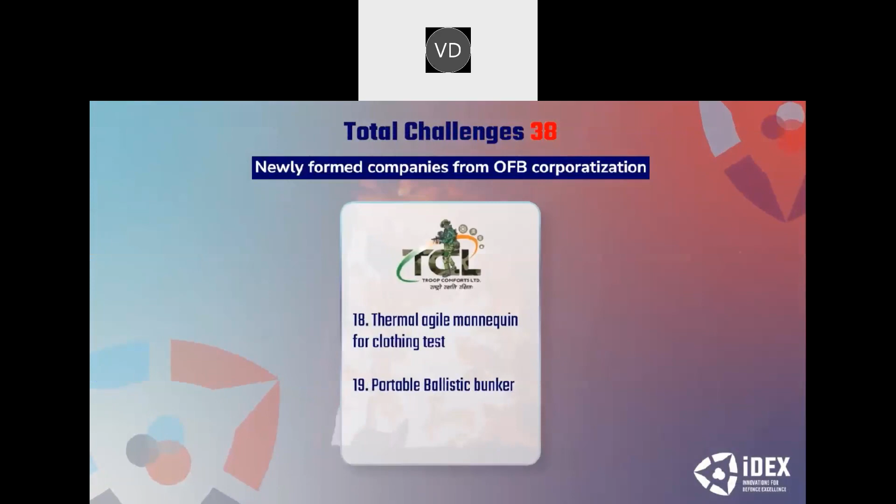Newly formed companies from OFB corporatization include Munitions India Limited with two challenges, Gliders India Limited with two challenges, India Optel Limited with four challenges, Troop Comforts Limited with two challenges, Armored Vehicles Nigam Limited with three challenges, and Yantra India Limited with two challenges.

YIL is participating for the first time and has stated two problems. I hope IDEX will bring innovative solutions to these problems. There is one challenge from the Indian Army, one from the Indian Navy, two from the Indian Air Force, and for the first time, three challenges from the Indian Coast Guard.

We have introduced three niche ideas under the IDEX scheme. This reflects the vision of Making in India and Atmanirbhar Bharat. Also, for the first time in IDEX, the Ministry of Home Affairs has participated with 7 challenges.

These challenges span across a wide range of advanced technologies, including artificial intelligence, advanced imaging and sensor systems, big data analytics, autonomous unmanned systems, secured communications, etc.

We invite startups, MSMEs, individual innovators, and research and academic professionals to apply for DISC 6. Selected applicants will get grants of up to 1.5 crore rupees, along with the opportunity to co-create and co-develop the defense technologies of the future with our armed forces. Besides the grant, selected winners receive product and business acceleration support from IDEX partner incubators, and access to defense facilities for QA and certification.

This is the next observation, wherein the polarization is not uniform. The one in blue is the horizontal plane and the one in red is the vertical plane. Ideally, if the polarization is circular, the patterns are expected to overlap in all regions, but we can see there is a gap between these two patterns.

When we refer to uniform polarization, we mean that the patterns should be overlapped at least from minus 90 degrees to plus 90 degrees, with a best match. If required, there can be a deviation of probably 1 dB or 2 dB.

We expect the development to take care of these issues and to ensure the other parameters, like beam width, 3 dB beam width, axial ratio, squint, and also the back lobe in all the polarizations - vertical, horizontal, slant, and in totality circular. This development should probably be for left-hand circular polarization.

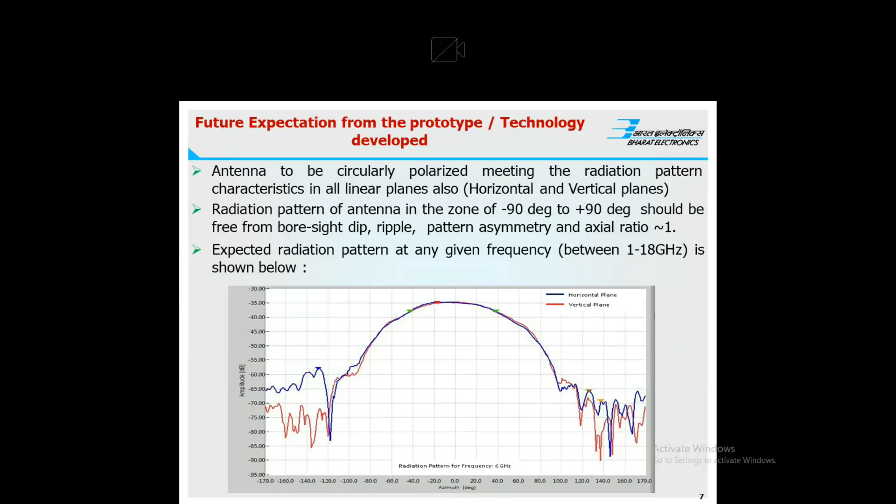So ultimately, the axial ratio shall be better than 2 dB over azimuth of plus 90 to minus 90 degrees over the frequency band. And it should, by default, meet all the parameters like beam width, back lobe, squint for all polarizations, meaning linear and circular, left-hand circular. This will result in achieving a better direction of arrival with accuracy of 10 degree RMS in all sectors.

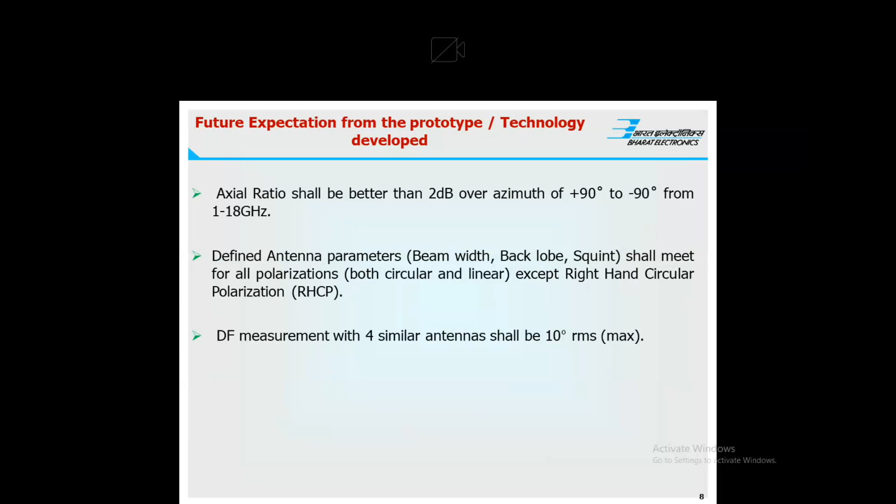Hope I could detail the problem statement, which can help. Do you have any particular doubts on this? Yeah, this is Rehan. So may I know which antenna solution you are currently using? It is a cavity-backed spiral antenna. No, the data sheet or any part number. Part number, we have sources from others, but I am not exactly getting what you are looking for in the data sheet. If possible, I can share it with you.

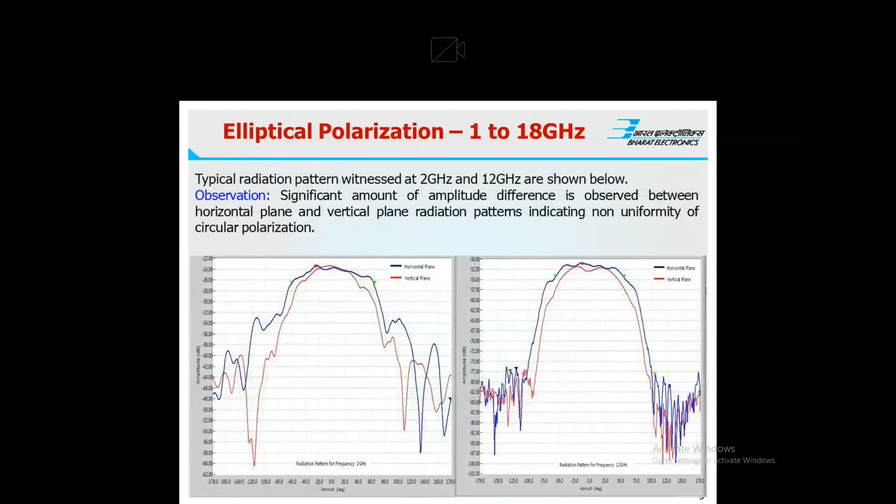Okay, and as you said, the polarization is left-handed, right? Yeah, left-hand polarization. Okay, and the size constraint is fixed or? We are already using a few antennas, so we have a restriction in the size. We have to match the dimensions to the existing ones, so that it can be replaceable. Actually the problem is that I think you are using from 2 gigahertz onward, right? And it goes to 1 gigahertz onwards. So if we go to 1 gigahertz, then the size of the antenna should be double, right?

Okay. So that's why I am asking if we can increase the size of the antenna a little bit. As I mentioned, we are already using these systems, and the new systems have to match the form factor. Otherwise, it requires additional modification on the platform of the aircraft.

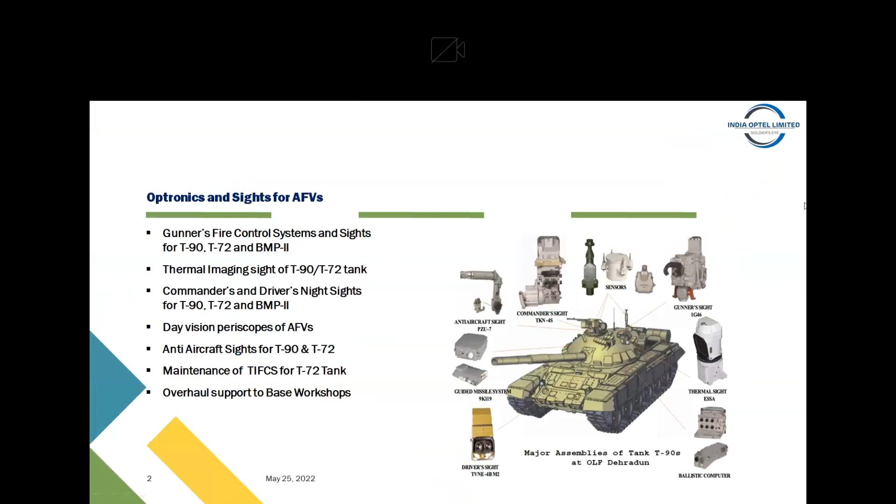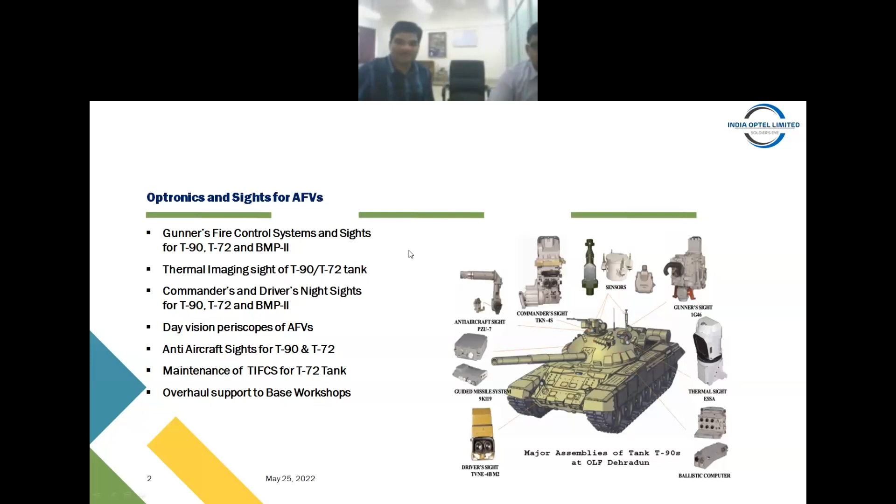Before we discuss the challenges, first I would like to discuss what we do at IOL, so that the startups can correlate the products to which these challenges belong. At IOL we have 3 units. One unit is for manufacturing fire control systems and optoelectronic sights of armored fighting vehicles. The second unit manufactures sights for artillery and infantry. And the third unit manufactures cables for field telephones and other equipment. It is called Ordnance Factory, Ordnance Cable Factory, Chandigarh.

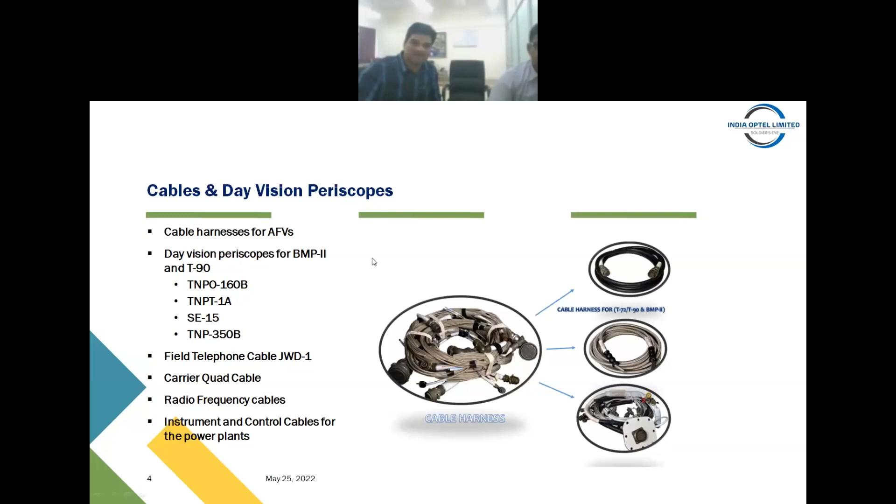Its core products are cables only. So these 3 units belong to IOL, and presently we have given these 4 challenges in this SIS. Of these 4 challenges, 3 challenges belong to the T90 tank gyro stabilizer of the gunner's main sight 1G46, and 1 challenge belongs to the gyro motor, which belongs to the T72 tank gunner's main sight.

The first item, which we name the gyro chassis, is the first challenge. This gyro chassis is meant for giving line of sight stabilization in the gunner's main sight of tank T90. The gunner's main sight is stabilized in 2 axes, horizontal and vertical. This is the core technology which we are manufacturing based on TOT from Russia, and at present this item is imported from Russia. This gyro chassis is part of the gyro stabilizer assembly.

The gyro stabilizer has an interface with the optical channel up to the head mirror, and the head mirror is an assembly projecting out of the tank. So whatever light is collected by the head mirror, that scene has to be stabilized by this gyro stabilizer with the help of the gyro chassis. This gyro chassis stabilizes the line of sight in 2 axes, horizontal and vertical. Both axes have one common gyro motor, which is a mechanical rate gyro concept.

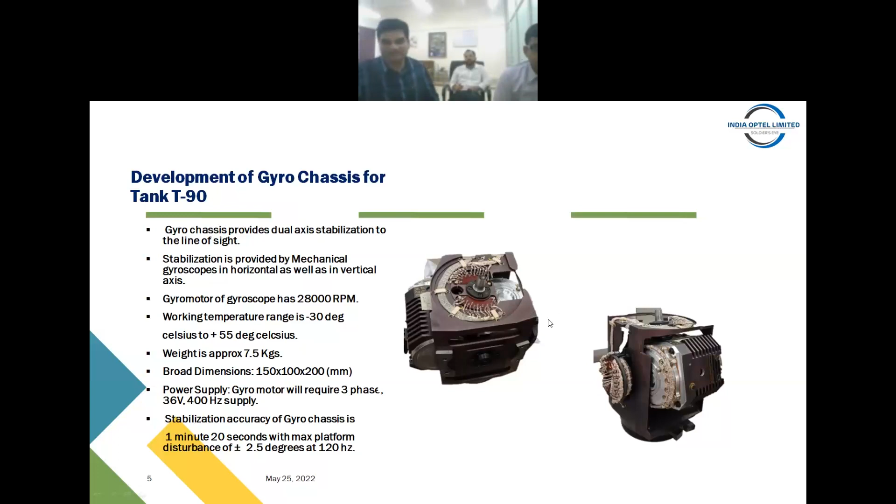That gyro motor rotates at 28,000 RPM, and at this RPM, after approximately 3 minutes, the gyro stabilizer activates, and then the gyro stabilizer is supposed to stabilize the line of sight after this activation time of 3 minutes.

Working temperature in which this gyro stabilizer is supposed to work is -30° to +55°. Maximum weight of this whole assembly is 7.5 kg, and this weight has to be very, very accurate, because if we change the weight of this assembly, then other parameters have to be balanced. So we cannot compromise, we cannot have much tolerance in this weight. 7.5 kg is almost fixed weight.

Dimensions of this product are mentioned here: 150, 100 into 200, all in mm. And the gyro chassis receives power of 36 volt 400 hertz from the tank supplies.

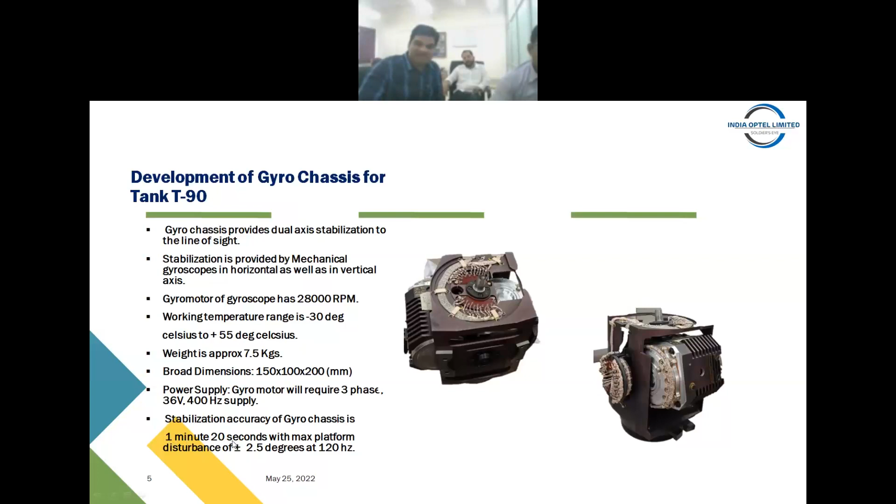And parameter for stabilization of line of sight is 1 minute 20 seconds at a rocking platform of 2.5 degree at 120 hertz. So when the tank as a platform is moving on an undulating ground, the maximum disturbance of the platform is plus minus 2.5 degree at 120 hertz. At that disturbance, the gyro stabilizer is supposed to stabilize line of sight at an accuracy of 1 minute 20 seconds. So that was about first challenge.

Now our second challenge is again part of gyro stabilizer of sight 1G46. This is another assembly which is called torque generator 800. Now, as I said, gunner sight is stabilized in 2 axes, one is vertical and second is horizontal. So when gunner is trying to move his line of sight horizontally or vertically, in both axes we have got 2 torque motors, so that he can maneuver the line of sight of gunner's main sight for full field of view. So for moving the gunner's line of sight in horizontal direction, this torque generator 800 is used.

So this is basically having one magnetic core, and over that there is an electrical winding, and this construction I'm explaining as per Russian design. So in Russian design, this has got a magnetic core on which there is a 3-phase winding. And again, input supply for this particular assembly is 36 volt 400 hertz, which is standard three-phase supply in T90 tank.

And this torque generator, as the name suggests, is supposed to generate a torque of approximately 700 gram centimeter to move the mechanical assemblies of gunner sight to maneuver the sight in horizontal direction. And again, operating temperature is standard from minus 30 degree to plus 55 degree.

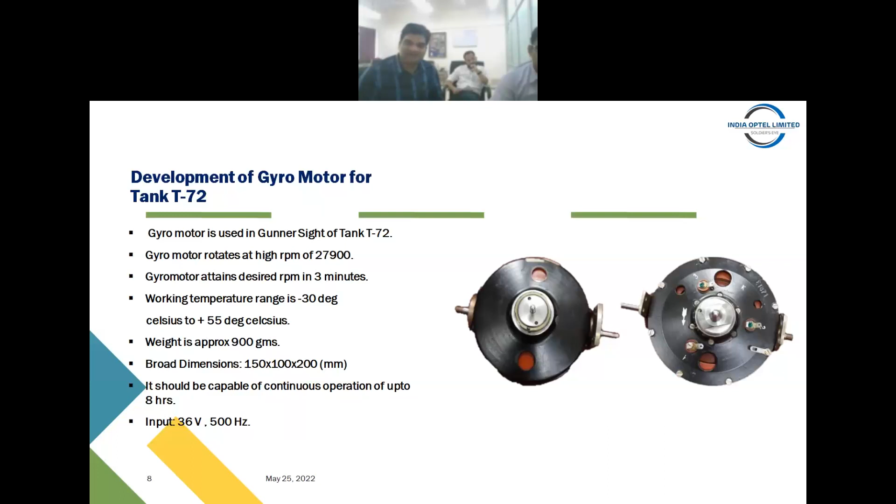So this motor is the basic element of the gyro stabilizer of tank T72. This is one of the standard items in Russia, and we got a TOT of tank T72 from Russia, and this particular motor has been imported till now. So we are expecting this motor to be developed here. This is one of the core technologies, so once this motor is developed, a gyro stabilizer based on this motor can be developed indigenously as well.

So this is all about the 4 challenges which India Optel Limited has projected in this. Thank you for your patient listening, and I hope we could at least brief you about our 4 challenges. And now if there are some questions, we can discuss them.

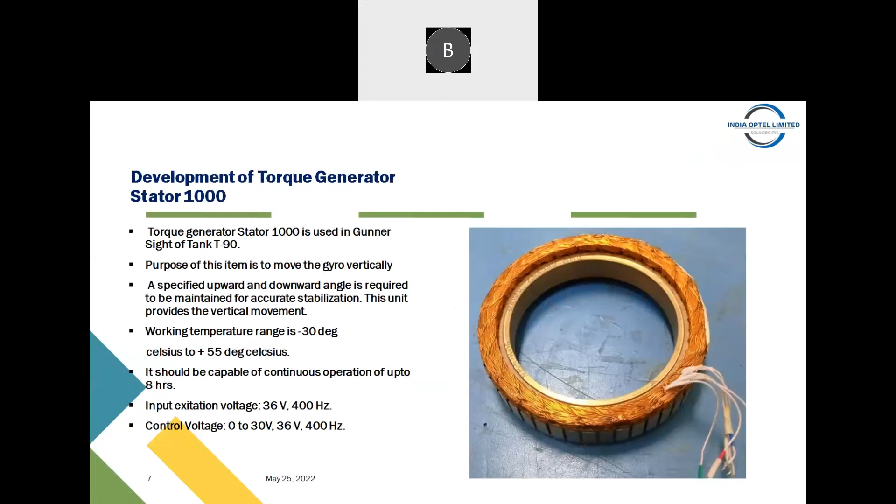Hello, sir. Good afternoon. This is Balaji from Torcon Power Drives, Coimbatore. Sir, is the dimension very critical in this one? What is the dimension for this stator, sir? Which one are you saying? Torque generator? Torque generator stator 800 and 1000. Okay. 800 and 1000, just 1 minute. Very good.

And the other point is, is the requirement only for the stator or the complete assembly? Sorry? Can you repeat the question, please? Sir, is the requirement only for the development of the stator or the complete assembly, including the rotor? The challenge is basically for the torque generator only. No, this challenge is for the stator only. For the rotor we have got one assembly which is mechanical in nature. Okay. And dimensions you asked.

And is the dimension very critical? Dimension is very critical from the point of view of fitment, because if you change the dimension, then it will not be form fit. You need to have the exact dimension so that it can be fitted in the existing structure, because it has to integrate with other assemblies. Okay, sir. For dimensions, leave your details and we will share with you. I think I have got the document, I need to find it. You can drop us an email.

Sir, good afternoon. I'm Commander Chais from ARTPARK, Bangalore. Two questions. What is the timeline we are looking for each of the challenges? And is it to be taken on by one entity, or are you looking at multiple entities taking on the different challenges, which are 4 of these? I think multiple entities can also take the challenge if they are willing to. And timelines, we expect this to be developed in a time frame of about 6 months. 6 months to 9 months is, I think, a reasonable time for development of these assemblies.

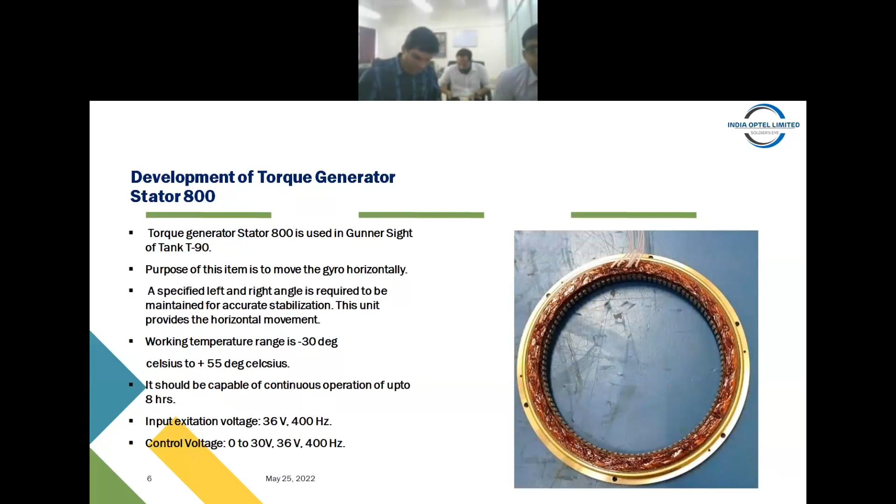So the dimension of torque generator 800, this is around 25.5 mm in dia. Okay, sir. And for 1000, no, sorry, it was for 1000. This is the smaller one. And for the bigger one, it is around 89. The exact dimension, just drop in the email to my email address. We will share the exact dimensions. But the order is like this: 1000 is 25 and 800 is bigger, that is around 89 mm. Okay, sir. Thank you, sir.

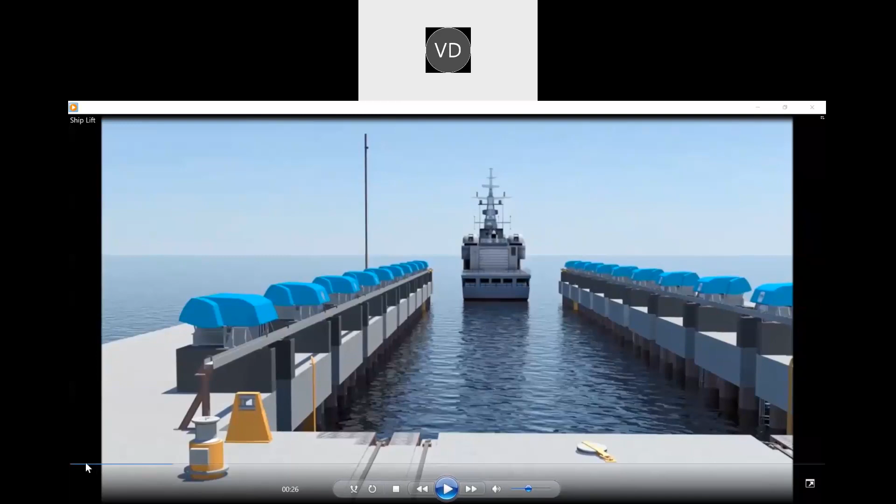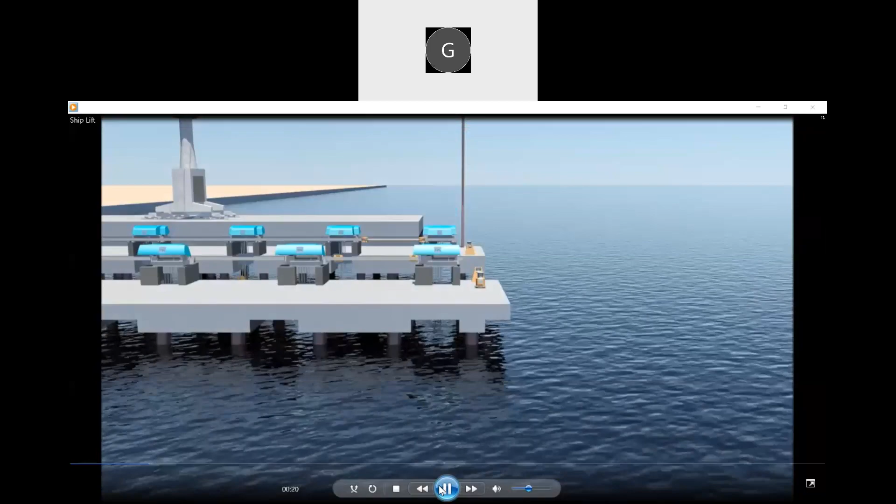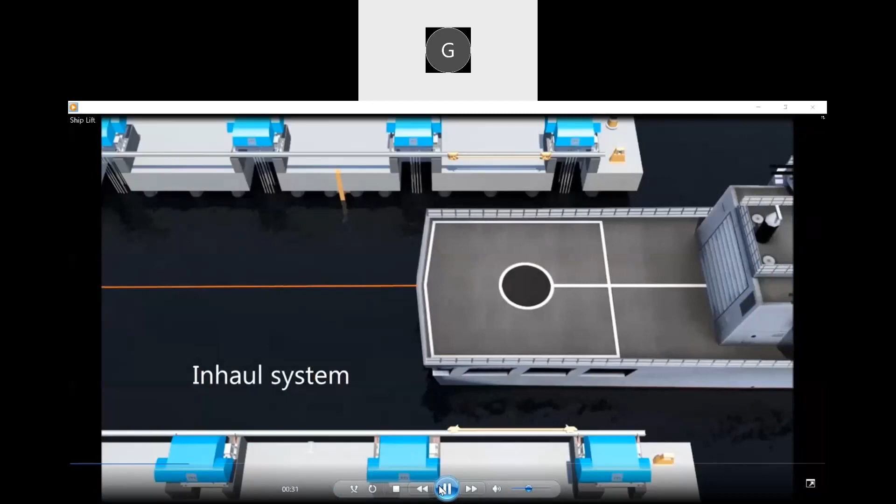Okay, so this is a visual representation of how the ship lift works. This is the platform that goes down, and the ship is basically guided into the area where it has to be brought on top. The winch system and pulley system is used with steel ropes that guide the ship into this area. And then there is a winch system and steel ropes installed on the left-hand side and right-hand side. You can see those blue small boxes there. So this is what is used to bring the platform on top.

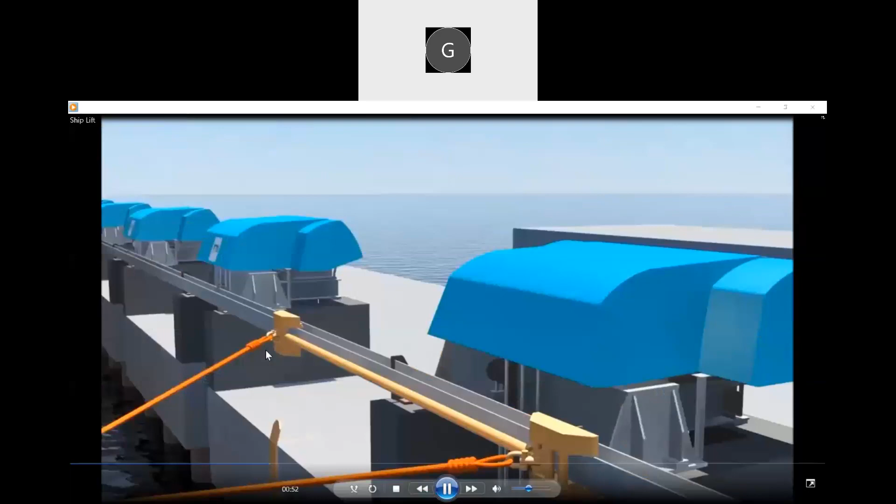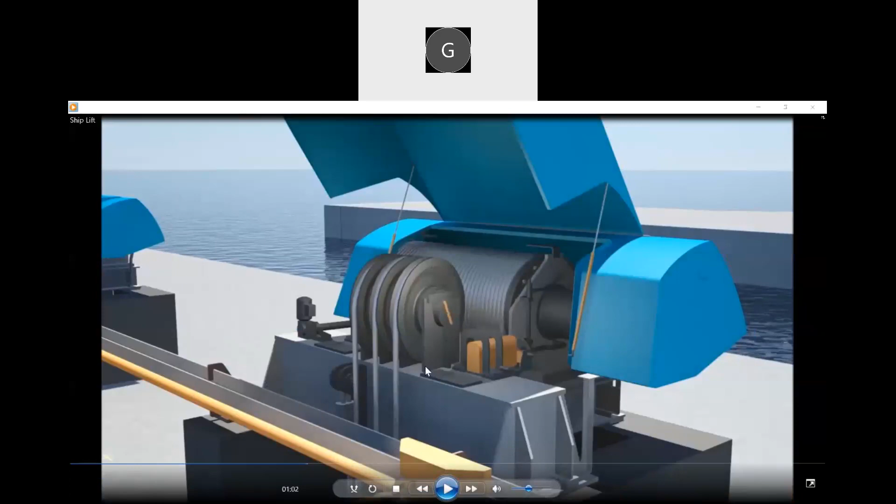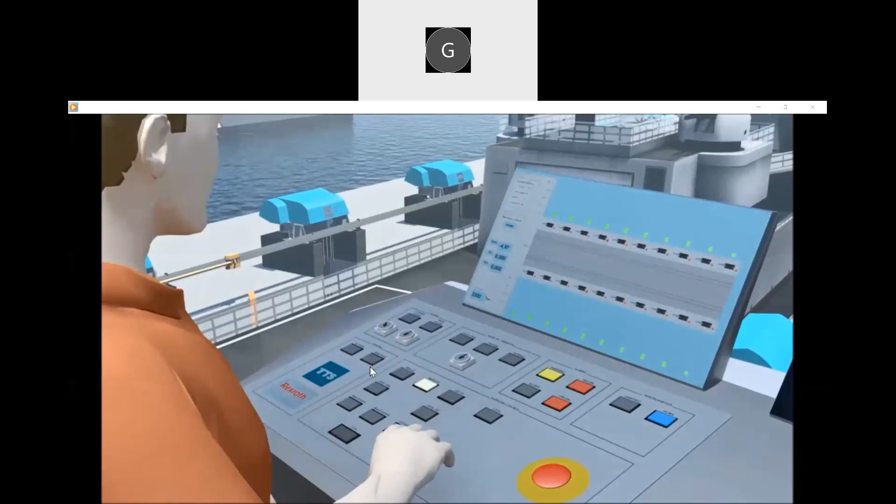So our issue exists here. You can see these are basically steel ropes. So this is what our issue is. Now when these steel ropes, okay, let this video get completed. So this is the hydraulic support that is there. And then the platform is raised. Now this is the winch that we want to highlight here. Share the PPT once more.

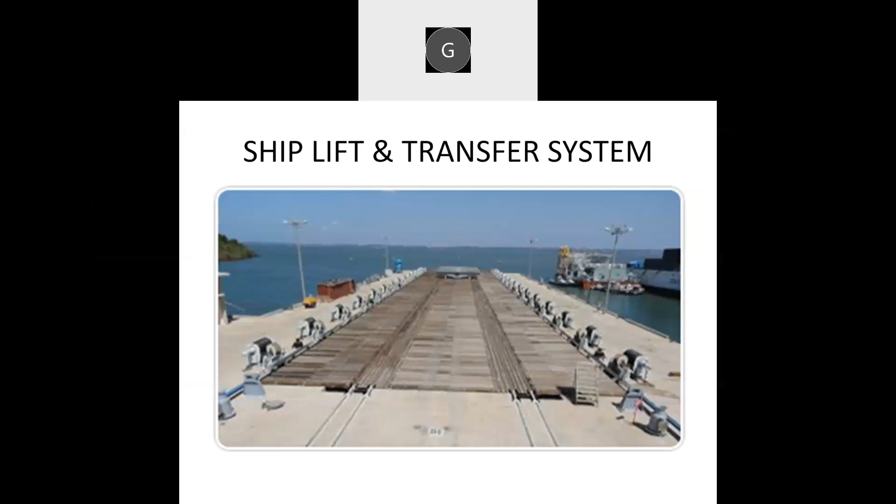So the ship lift and transfer system: basically the overall length of the ship lift is 120 meters and the breadth is 25 meters. Lifting capacity is around 6,000 tons. And then you can see this is what we had displayed earlier. These are basically photographs that have been pasted here to have a greater understanding.

The pulleys and the winch system that are installed at the side use steel wire ropes. And then there are 14 winches on the left-hand side and on the right-hand side of the platform. And these wire ropes, which are on the winches, consist of an independent core and strands around it.

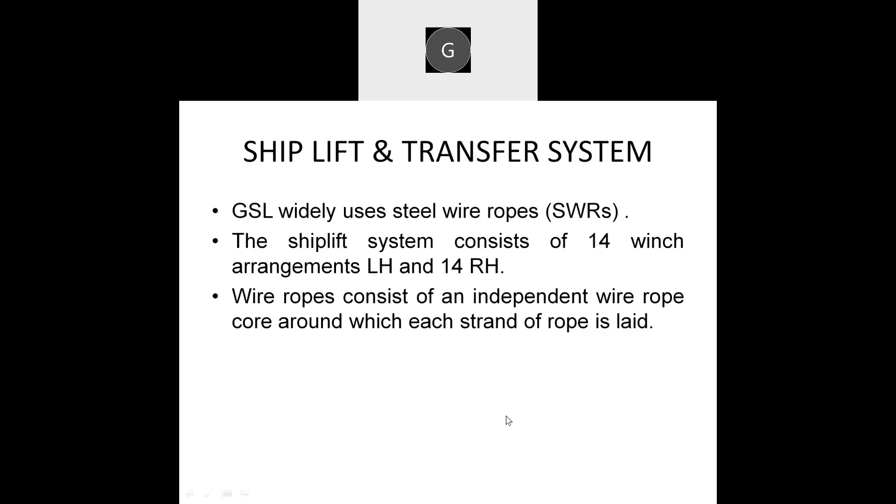Now, GSL's issue is that these wire ropes are susceptible to degradation due to mechanical as well as environmental loads during their service life. The thing is that the steel wire ropes have to be in greased condition, and when they are in water, there is sedimentation taking place. So mud gets stuck on them, and then they become dry. And then due to wear and tear, the steel ropes tend to get weak.

So the sea floor under the ship lift accumulates mud and sand and affects the area under the winch installation, leading to corrosion and other effects on the steel ropes. So this is basically our issue.

Now we want a condition monitoring system which monitors the health of these steel ropes and keeps a check on the sedimentation under the platform of the ship lift, so that we can do something about it. Maybe dredging can be undertaken to get rid of the sedimentation, and the steel ropes' health is monitored so that they don't become weak, and periodical maintenance can be carried out.

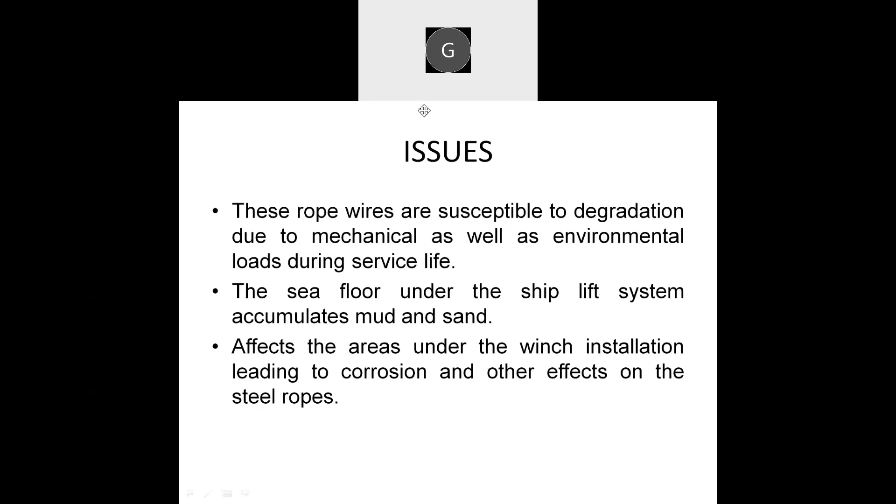But the issue is that these are continuously wound, and a small weakness in the steel rope, a single weak link, may have an effect on the whole working system. So this is the issue I wanted to highlight, and this is our problem statement. Basically, we want an AI-based system which will monitor the health of these steel ropes and keep a check on the sedimentation being accumulated under the ship lift platform. This is what the challenge statement is all about.

Was I clear, sir? Any questions? Sir, in the challenge you also talked about the cranes. Is that not a part of the scope? Do you want to just focus on the ship lift system to begin with? Yes, at the moment, the LLC crane is not a part. But if it all goes well with this condition monitoring system of the ship lift, then we would like to take it ahead. That is the plan as of now. Okay.

So for the ship lift system, in the video you showed, it has a control room and some automatically controllable system. Yes, yes. So do you want the sensors and the data to be integrated with any existing systems, or can this be standalone? It can be standalone; it's not necessary that it be integrated with the software that is already there.

Okay. And the data coming from the sensors, can those sensors be connected to any cloud platforms, or should that be on-prem? It is recommended that we have it on premise. Cloud-based is not recommended for security reasons. Okay, sir, understood. And what timeline would you expect for this? 10 to 12 months. Okay.

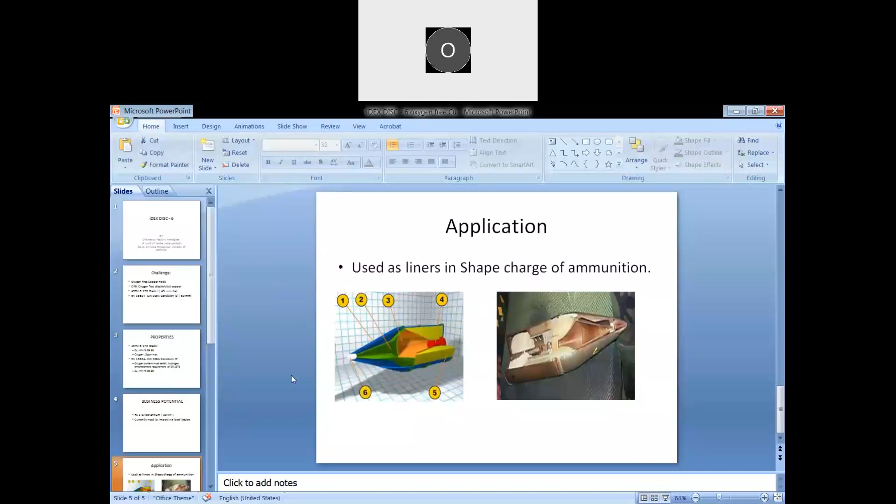But here we are given copper only, which is oxygen-free copper. So these are the standards which guide the specifications of these copper rods: ASTM B170 grade 1 and EN13604. Basic properties of this copper are, first of all, it should be 99.99% pure copper, and in EN13604, we require that oxygen content must satisfy the corrosion and brittleness test.

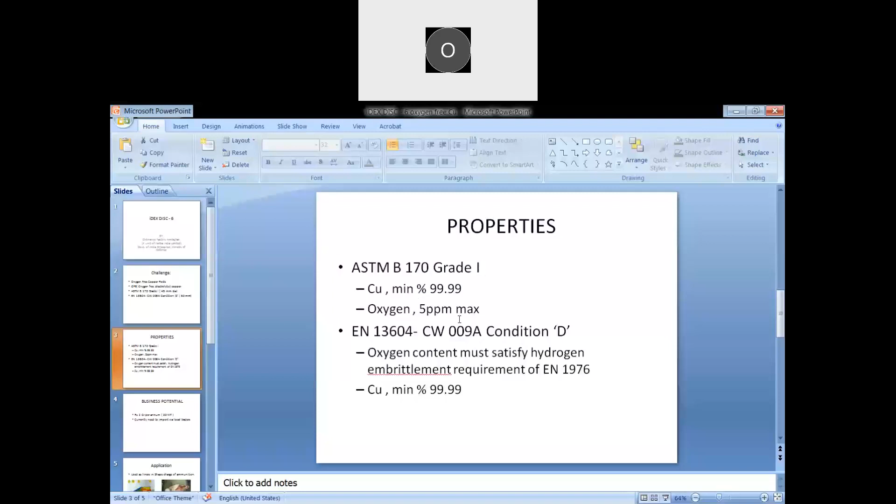Right now the problem is that we are not able to source this material indigenously. We have to depend a lot on our local vendors, who try to import it from other nations, which leads to heavy delay in our production facilities. We have a huge business potential in this, but still, because of non-availability of material, we are lagging behind a lot in supplying this ammunition to our concerned sister factories in Jabalpur. So we are desperately in need of this if anyone can help us with it.

Thank you, any questions? Hello. Hello. Yes sir, you are audible, please go ahead. So this was the first thing which we shared about. Shall we move to the second one, or any questions on this? If anyone has any query, they can ask about this particular challenge, or we can go for the next challenge also.

Now we are moving to the second one. Yes sir, you can go for the second one please. My colleague, Ms. Niti, will share the details of the next challenge.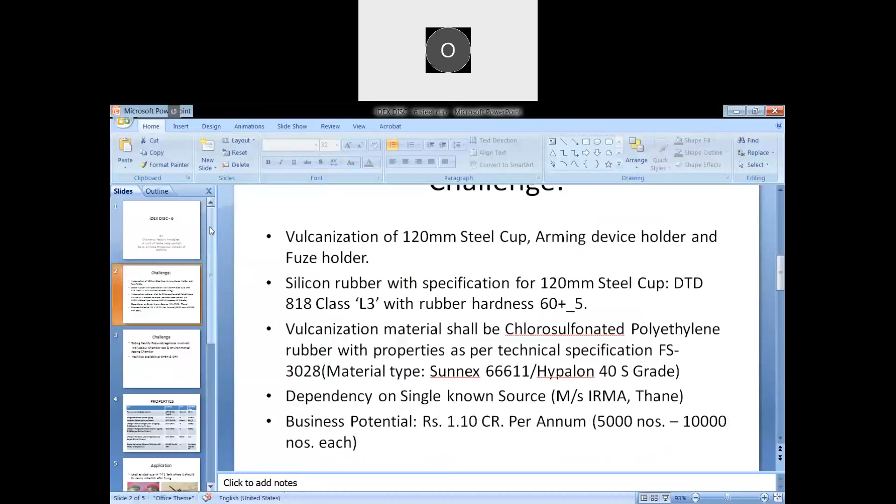Hello, this is Shruti Yadav from Ordnance Factory, Ambajhari, one of the YIL units. I'm here to discuss one of the challenges, that is regarding rubber fabrication of three main components: 120 mm steel cup, arming device holder and fuze holder. One application I'll show for the steel cup is that it is used in the T72 tank, used as a cartridge case only, and it should be easily extracted. In the upper part you can see the rubber vulcanization.

So these are the specifications of the rubber. As per the specification, it should be DTD 818 class L3, with rubber hardness of 60 plus minus 5. The material should be chlorosulfonated polyethylene rubber with the specification as shown.

For the components, our business potential is huge, that is 1.10, and our annual requirement is 5,000 to 10,000 numbers.

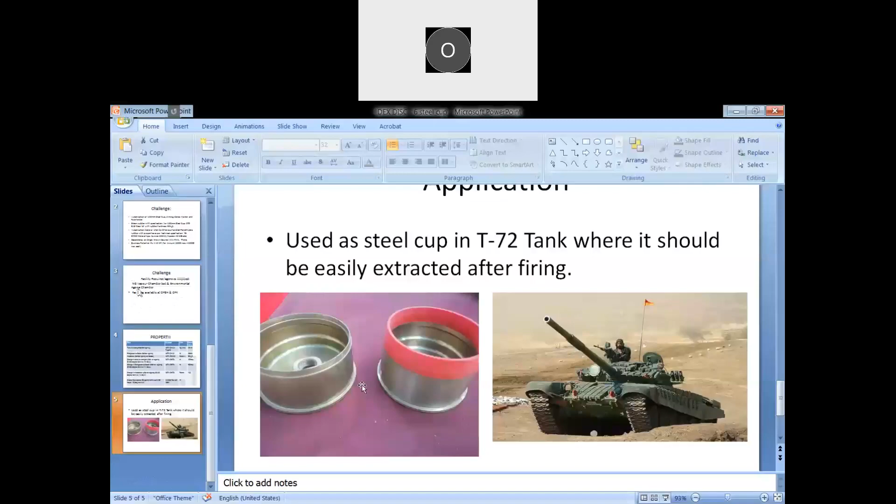Right now we are purely dependent on IRMA, but the rate of production they are supplying to us is very less, and that is why we are not able to accomplish our target. So we are in need of better suppliers so that we can fulfill our target timely.

This is from my side. Any queries, anyone? Any queries for the YIL challenges? For both the challenges, if anyone is having, please ask.

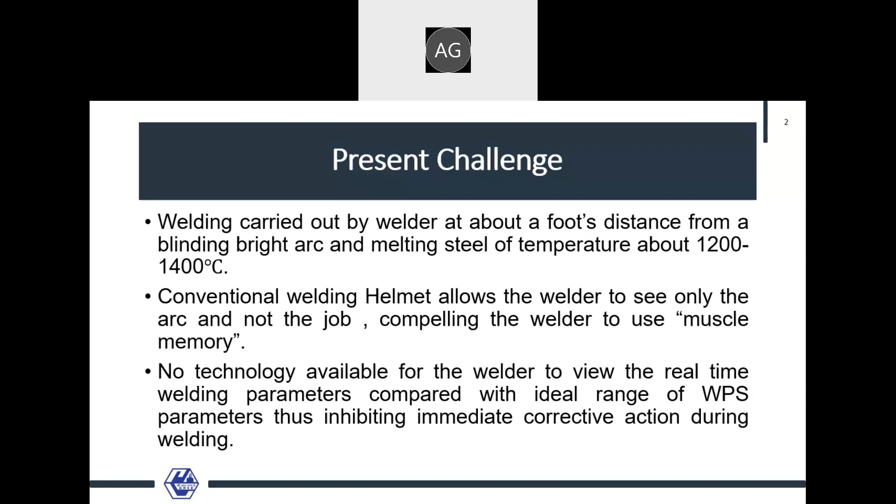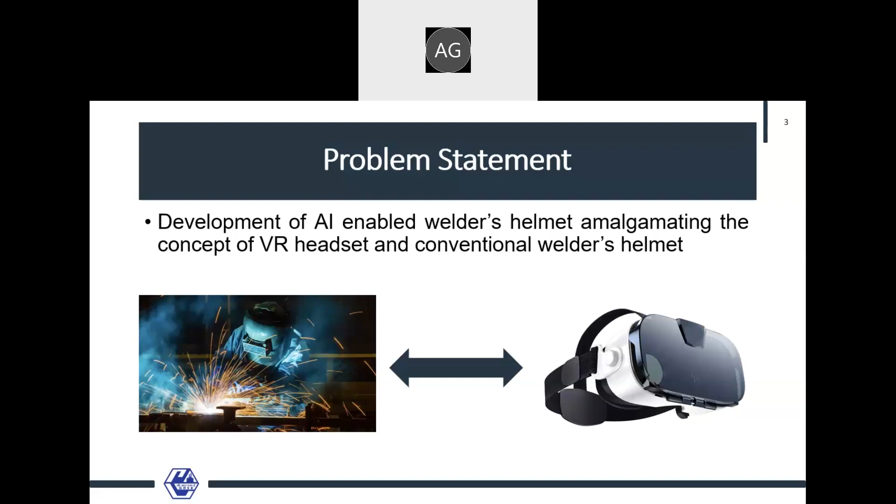This is the present scenario, and in our shipbuilding industry an enormous amount of welding work is going on day-to-day basis. This is the actual scenario on the left side, and on the right is a schematic presentation. We are trying to amalgamate VR or AR technology with this welding helmet, sir. So next slide, sir.

In the succeeding slides, we are going to discuss the operational functionalities and capabilities expected, or that we intend to develop, through this AI-enabled welding helmet.

Let's start with development of an AI-enabled welding helmet mounted with a two-way camera with suitable sensors, allowing the welder to see both the job and the bright welding arc at the same time, which at present is very difficult for a welder to see both at a single time. We intend that the AI-based system in the helmet should be able to compare the real-time recorded welding parameters with the ideal range of welding parameters as per WPS mentioned earlier. So next slide.

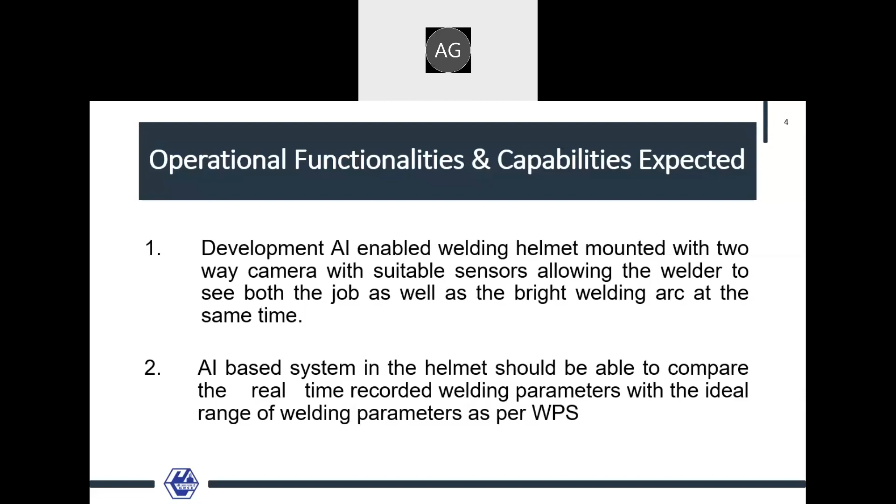You can move to the next slide. Right, thank you, sir.

The helmet should have a wide display area for real-time controllable welding parameters, some basic ones like traverse speed, electrode stick-out distance from the electrode to the job, voltage, and current captured from the welding machine. This may require an interface between the welding machine and the helmet. So next slide.

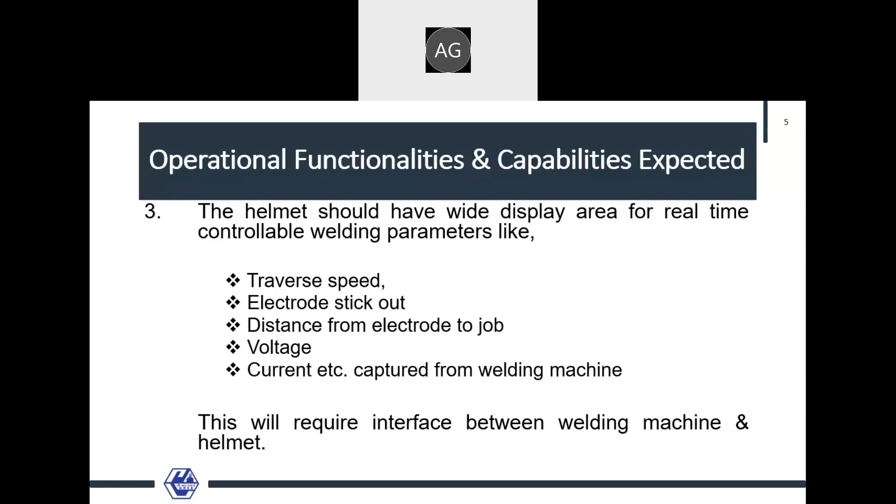The display system should have the ability to provide feedback to the welder on the helmet screen in a color-coded manner—green for parameters in range, red for parameters out of range—based on comparison of real-time welding parameters to the ideal WPS range, enabling the welder to take immediate corrective action. There should be a provision for the welder to upload and select the relevant WPS prior to starting a welding job, which is very specific for a particular job, and an option to take feed from a suitable welding machine is also acceptable and desirable. So next slide.

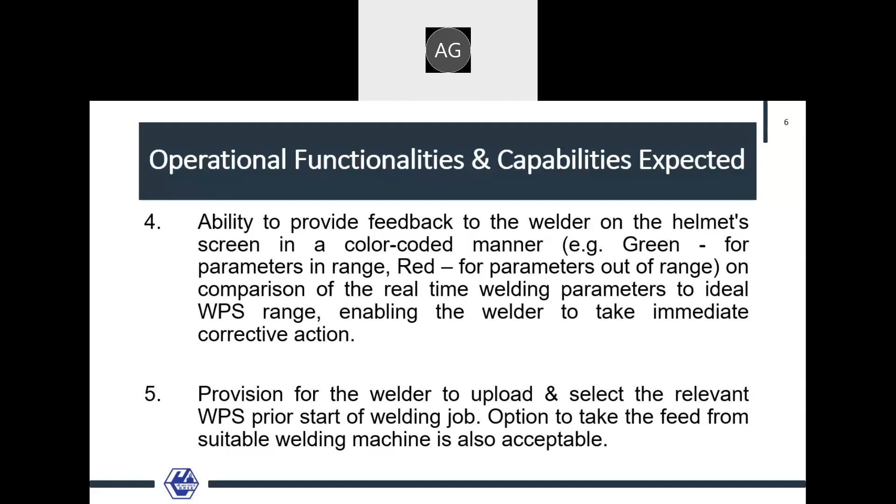And the solution - this helmet should be a rugged, lightweight, and comfortable product for the welder to use for a relatively prolonged duration, maybe 5 to 6 hours based on the job that day. There are standards like ANSI or CSA compliance that it should be built to, considering the safety aspect of the welding helmet. It may also be housed with a rechargeable and replaceable battery of appropriate capacity, allowing unhindered usage for prolonged periods.

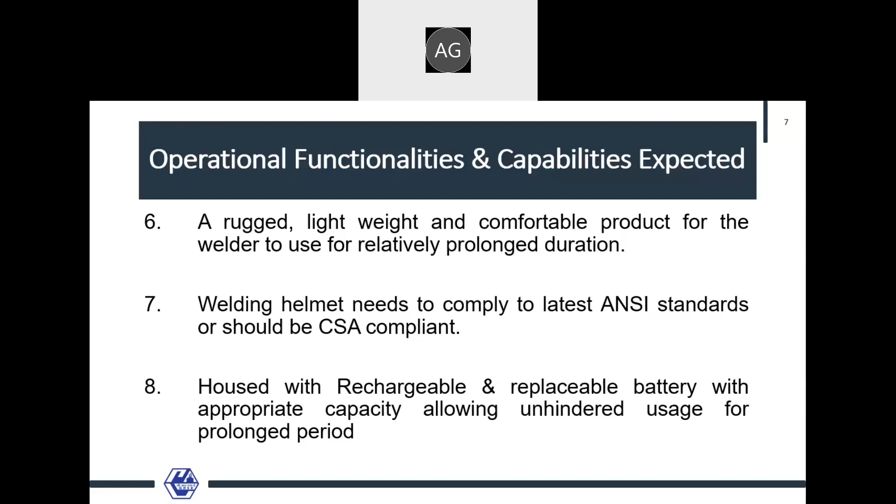The last requirement is storage space enough to store WPS data as well as real-time welding parameters, recording from continuous usage of the helmet for at least 1 week, or 6 hours per day usage. So these are the functional requirements we are expecting while developing this AI-enabled helmet, sir.

There is, I think, one slide left, sir. You can proceed to the last slide, sir.

The startups or MSMEs can collaborate with reputed academia like IIT Kharagpur, IIT Chennai, welding societies like IWS, or research facilities like WRI, for co-development of the prototype and testing of this equipment in their facility. So this is all from us, sir. Thank you, sir.

We can have questions for this as well. Any query for this particular challenge? I think that we don't have any queries for this particular challenge. One query was there online, I hope that we might have it, so I will ask on behalf of that one. Just a minute, one question, Vishal, for this - after your question, I can ask. You can ask your question first, and I'll try to figure out that one.

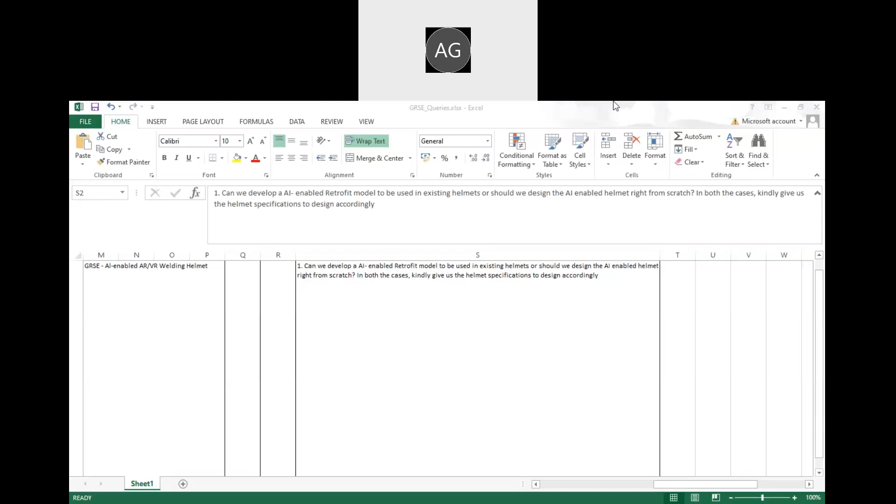Okay, thank you very much, sir, for clarifying all the queries. I hope there's anyone having any more queries for this particular challenge, or we can wind up and end this session.

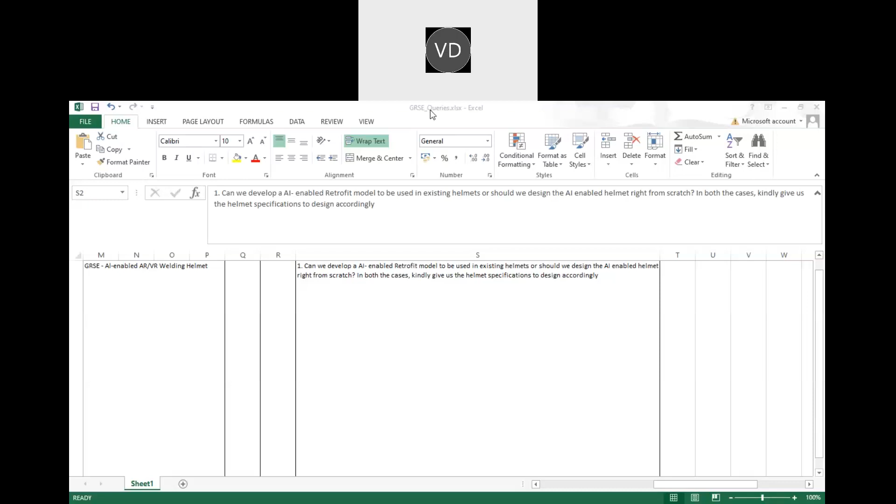Yeah, Vishal sir, this is Dinesh Natarajan from Welkenrum Technologies. Sorry that we had some issues, we couldn't join initially. So we have some queries with another challenge - if at all possible, shall we discuss it right now, or should I reach out some other time? You can ask if the nodal officer is present, he might be able to answer your question.

It's about this IOL challenge, development of gyro motor and torque generator. Very basic questions I have - whether the torque generator and the gyro motor can be of different motor specifications. Suppose the present ones are induction motors or some other type of motors, can we change the specifications of the motor, or use a different technology motor, without compromising the application or the specification performance?

Mr. Dinesh, we request you to please repeat the question. Yes, sorry. So I have a question. Suppose the gyro motor which is being used presently is of a technology, say induction motor technology, and we want to change the technology to some other motor like SR motor, synchronous reluctance, BLDC motor or PMSM motor. Can we do that without compromising anything on the performance, the specifications or the functionality? Can we achieve the same performance in different types of motors?

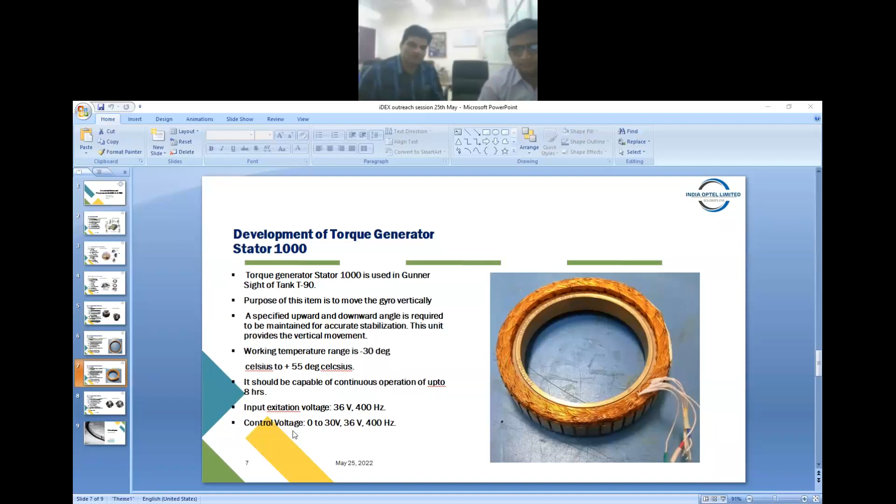In gyro motor, there is no control voltage. There is only the input voltage, excitation voltage. But in torque generator, there is excitation voltage which will switch it on, and then there is control voltage which will modulate the torque output. Okay. Understood, sir. So these are my questions.

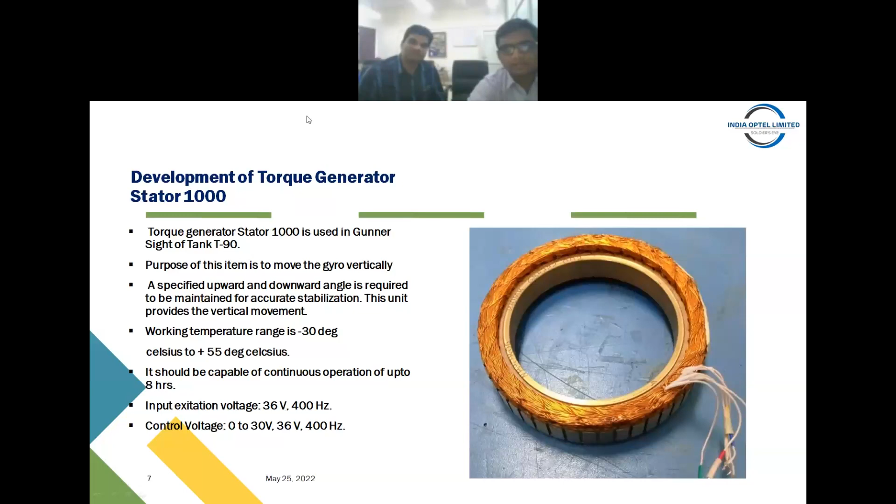Let's end this session, because almost all the queries have already been addressed. I would like to thank all the DPSUs and their nodal officers who joined, presented their challenges very nicely, and addressed all the queries that have been asked by the startups.